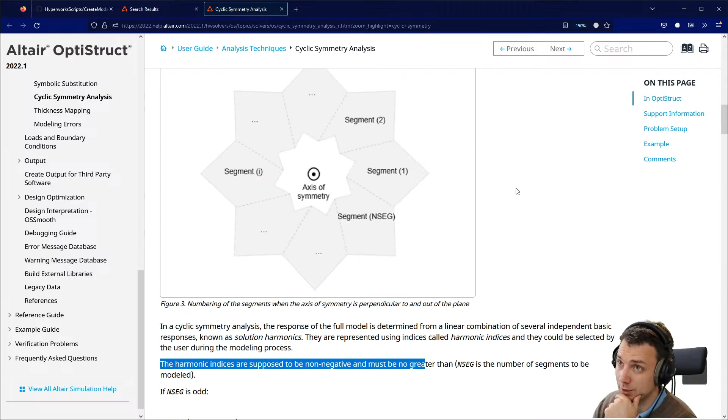And how this works, I was just reading about it, as I never dived that deep into this topic. It explains here a little bit about how the symmetry is achieved, and it uses harmonic indices, and you can also choose those. And I really don't know if I ever did that, and I'm not quite sure if I know exactly what is meant by that. But as far as I understand, you could have symmetry in multiple ways, right? So if you have the segments from 1 to n, let's say that one segment must be the same as another segment.

For example, let's just use here a cross, right? So segment 1 would not look like segment 2, because segment 2 would be empty, but segment 3 would be exactly like segment 1. And those are the harmonic indices, I think. So every second segment is the same for this cross, but you could also imagine that you have a star which has a line through each segment, and the harmonic indices would be, in this case, every segment. So every segment is the same. You see that you can have, how would you call that, sub-symmetries, right? So you have a pattern of repetition, and this pattern can be

almost basically arbitrary. And then it tells you that if you choose a lower number of those, I think it's segments, right? Lower harmonics lead to highest contribution, right? So if you have every segment, that would be a low number because it's 1, right? But on the other hand, I don't think I got that really. But you can see that, for example, if you just specify 5 repetitions, this would have an effect of having 5 sections which are more or less the same.

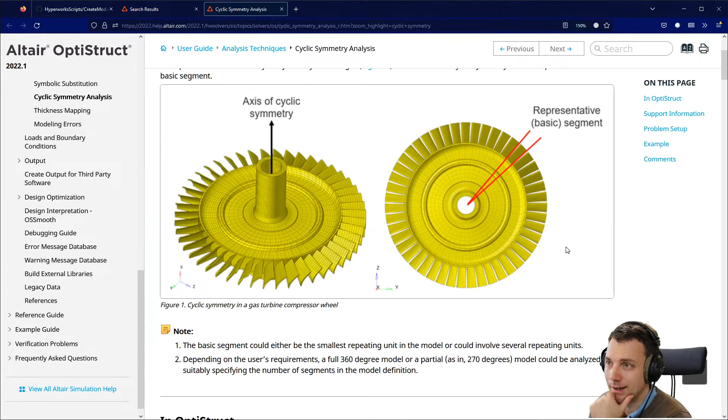Wait a second. If I think about it a little bit, it could be that it is not really talking about symmetry constraints, but those would work in the same way. Because to just analyze a structure, you could also pick a segment arbitrarily, and then just do a simulation based on this. So I'm not really sure what I'm looking at.

So with a linear static analysis with cyclic symmetry loading, you can do that. But here it says cyclic symmetric loading. It is recommended to use all the solution harmonics to obtain the same result as the full model. So it's talking about a reduced model. In this case, this is not really the symmetry constraint we are now facing with the optimization. It's kind of the same thing, but it's not really what we should be looking at. Let's go back and see.

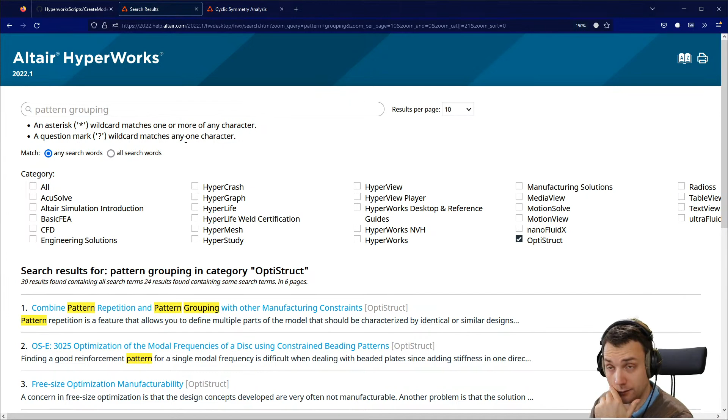It's all talking about cyclic symmetry analysis. Maybe I have to search for something different. I mean, it's definitely known under a different word named pattern grouping. But pattern grouping now would also have the plane symmetry in it. Yeah, and I think now I see that it's a little bit more tedious to find.

And that's maybe why I get these questions a little bit often about cyclic symmetry and how to apply it. And this is exactly also the reason why I would want to make this video. And yeah, this is more or less, okay.

Draw directions. And there should be the pattern grouping somewhere here. Extrusion constraint. Yeah, we have here pattern repetition. Plane symmetry, okay. Cyclic symmetry, I think this is more like it. All right, now cyclic symmetry can also be defined through the use of pattern grouping.

Like I said, you have a base node, a first node, or in this naming scheme, they call that anchor node, and this defines a plane where it is acting in the normal direction of the plane. So you have that, and now the number of repetitions is the second thing which you have to provide. And to add planar symmetry within each wedge, a second reference to grid needs to be done.

So you could also have a planar symmetry additionally to the cyclic symmetry. So this could be done as well. But for our case, this is not really a thing because we would not have a third dimension here, because in our model, you see, that's just shell. So planar symmetry would not change anything, really. Okay. So let's go back to the model.

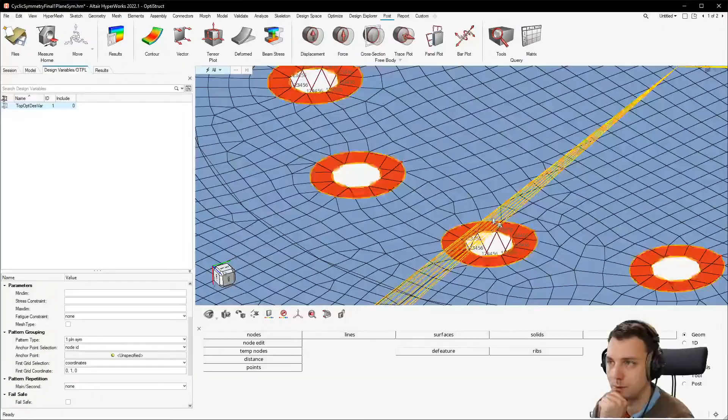First of all, we have a shell optimization now here, right? And the shell optimization consists of a design space and a non-design space. You have the red elements, which are non-design space. You have some boundary conditions, and you have the symmetry condition. So this is what we have done until now.

Now, I would want to do a little post-processing here and to just see different models, because what we have run here is some of the data. I think the only thing that was missing was the one with three symmetry.

Let me see. So just to show you here, this is the folder where I have stored the models, and you see from 1, 2, 3 is missing, 4, 5, 6, 7, 8, 9. So those are the optimization models I ran until now. And now I would want to run the third one as well to just be complete here.

So let's check back on our pattern grouping, should be here, right? So you have here pattern grouping. Design variables, then here in the topology design variable, and then in the property editor under pattern grouping. And you see here that's one plane symmetry, which is completely bonkers. But we will change that to be cyclic. Now here the number of the cyclic repetitions, in this case 3, because that's the one we are missing.

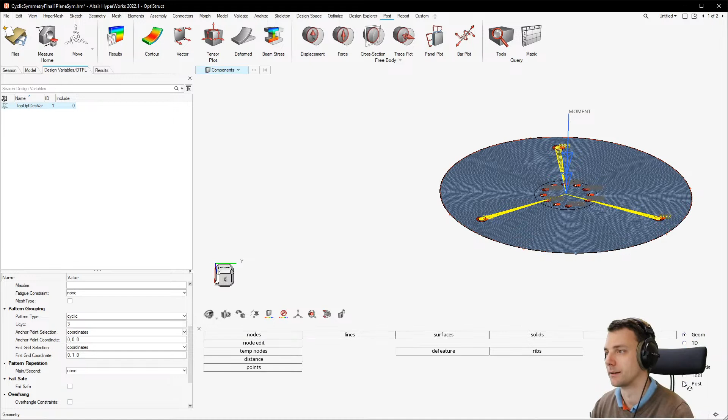And then anchor point selection. Let's choose to use coordinates because I think the center is exactly here. So I think that should be fine. Let's make sure to just create no panels for me. Oh, I'm sorry, no panels.

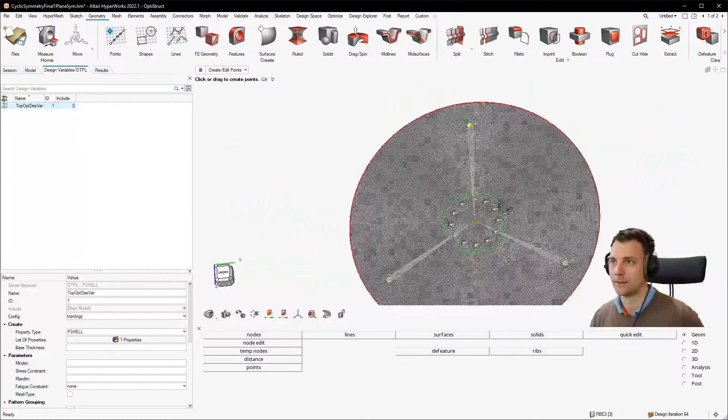Because the mesh is not regular. If the mesh would be regular and angular-wise you would have the same node pattern all around the circle, then you would expect to have the center point here to be exactly at the center, right? But in this case, you have it not, because I had used calculate the master node here, and so it was a little bit off. So we could fix that, I think.

So my quick fix would go to F11 and just do the replace point. Not sure how to do it with the panels, to be fair. If I just do something like replace, replace element. No, it's not really that. Let's see if I'm even right to do it like that.

So I would choose this point to replace. I cannot select it anyhow. Okay, forget about it. So you would want to update this element. All right, come on, let's do it. First of all, what I have here is not a node, it's a point.

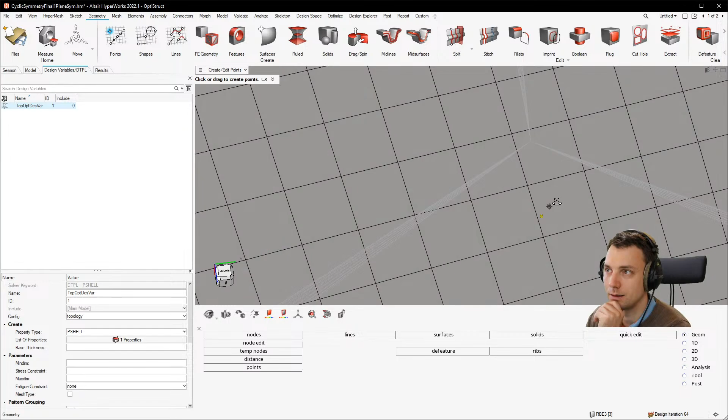So this is the first thing I think could go wrong. And the second thing is how to do it. Forget about the points here. You would want to go edit out and then choose the element selector by pressing the button E and then selecting the element. Then go to model and to RBE3, I think. This should be RBE3. And now you see you have already selected your independent nodes.

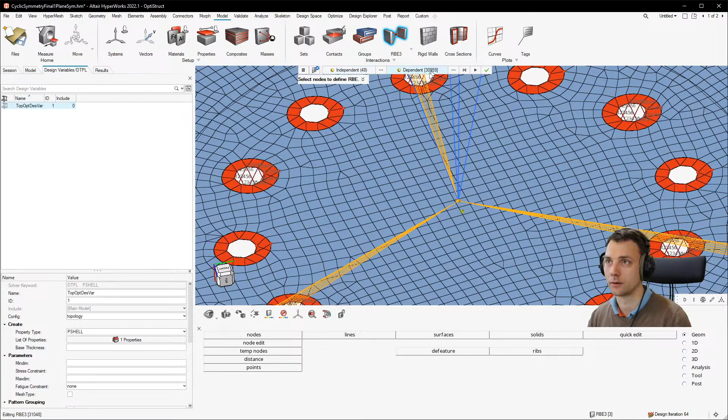Those are the other nodes, the slave nodes. And this is the dependent node. One is selected. Let's select this one. You see? It's not working. It's not working. And yeah, if I have now my forces gone, I will throw away the model and I'll just leave it be.

Yeah, I have lost a moment. This is something which happens if you choose to change the node: the forces which are defined at the node, they are gone. So don't do it. Okay, screw that. I will just throw this model away. Just load in the model with 1 times the rotation. So I will just use it here. And if that's not perfectly in the center, that's okay for me.

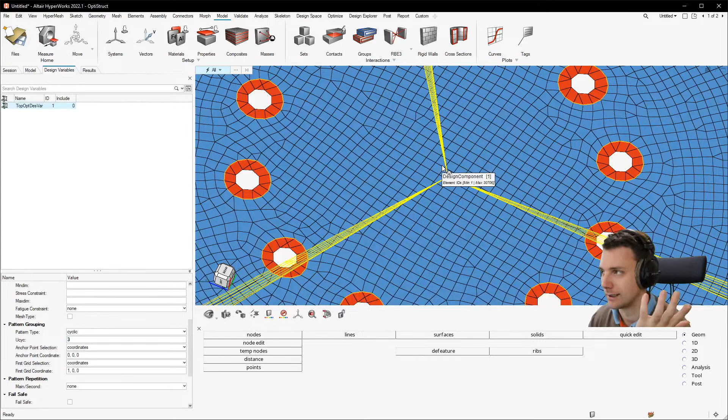Now, I want to change the design variable. So I go into the design variable browser, go back here, and then just use this one. Yeah. So as of here, this is perfectly fine anyway, because you would choose coordinates and not the node itself. So if you would have selected the node, it would be slightly off. But with the grid, it doesn't really matter, to be honest. So the thing is now selected here.

We have 3 times u_cyc, number of cyclic repetitions for cyclic symmetry. This field defines the number of radial wedges for cyclical symmetry. The angle of each wedge is computed as 360 degrees divided by the number of cycles. Default is blank and should be an integer above 0. Okay, that's done. Now let's just quickly run that.

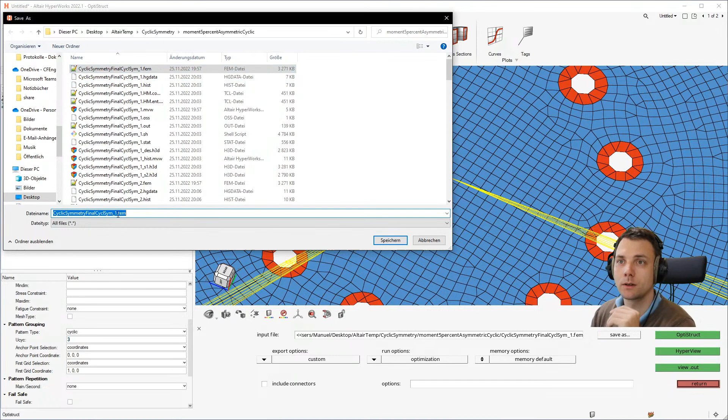Is that correct though? I will just simply make sure that it is. So I think the path should be the one. Yeah. And now we just want to change it to with a 3 at the end, so that we can track that. And this should give us no warning with renaming, but should just run it. Okay. Now this is done. The thing is now, what should we do next?

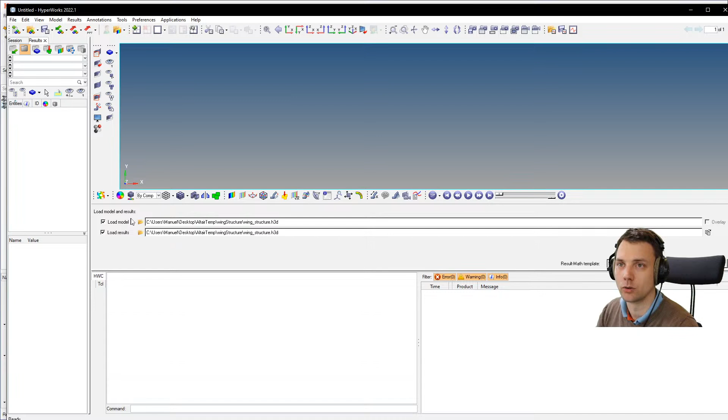Now comes the post-processing part. So let's assume we would want to post-process it. And just so you know how the old ways worked with HyperWorks. Or you could still do it like that, but I'm not sure how many versions you have left to get to the new layout. So you could launch HyperView. This is basically HyperView, and this is the old layout, so you would just load in a bunch of simulations. For example, we'll just go to the correct folder, and load in the design variables, right?

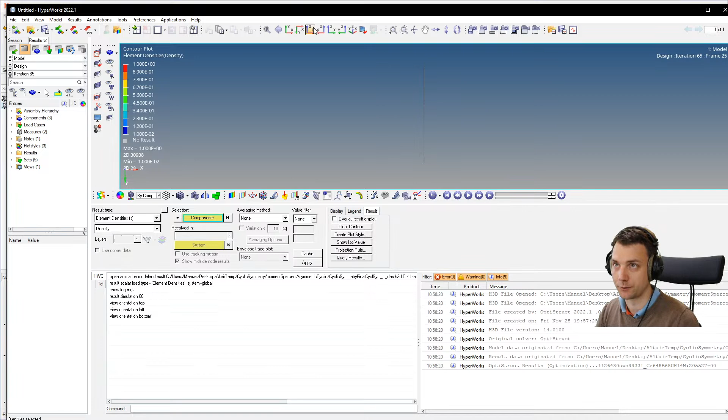So this will be the density plot. You can plot that, and it's with one cyclic symmetry. So this should be any structure really, because you have one symmetry per 360 degrees. So this is actually not much different from a non-cyclic symmetry. But let's see if we find any asymmetries here, because I think with the three symmetry we found some. First of all, let's ditch that away. Yeah, there are asymmetries here.

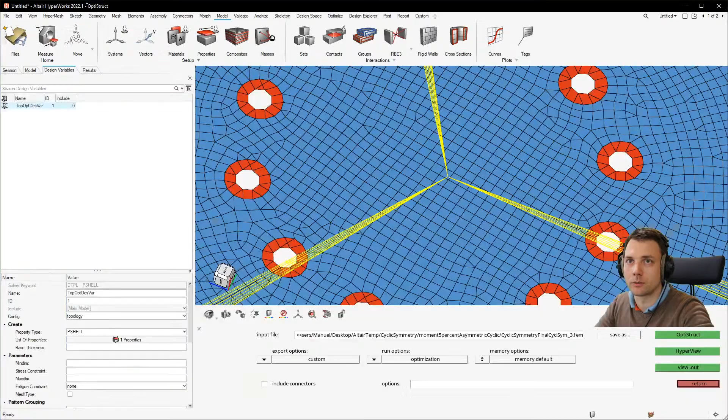So if we just go and rotate it like this, so that direction is here, and I think it was, no, I think the forces are not shown, right? Let's see. Yeah, okay. All right, it is this one. So top Y, top Z direction. That means it will be, in other words, top Y, top Z direction, this one.

Could we have spotted that? I think you can see that it has higher density elements here. So if you had to guess, I think you would come up with that too. Because here you have more compliance, so it will have more of a reason to put elements there to reduce it. And so this is what happens. That's exactly what happens.

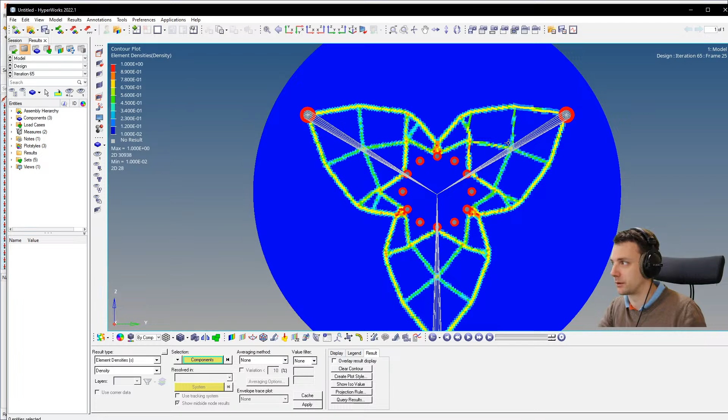Now, we want to combine or to look at different simulations. And the way to do this here is to choose a layout. And the layout is chosen here. It's a little bit different. Now, if you want to have 9 separate windows, right? So we could work like this.

So it could work like this, and now just choose to change the result, because that goes a little bit quicker. The model is the same anyway. So this would be the second one, this would be the third one. It will be a little bit boring to watch me do this, but it will load the results in every window, and then we can compare. And we have to reload the third one because the optimization is still ongoing, so it's not really finished. So 1, 2, 3, 4, 5.

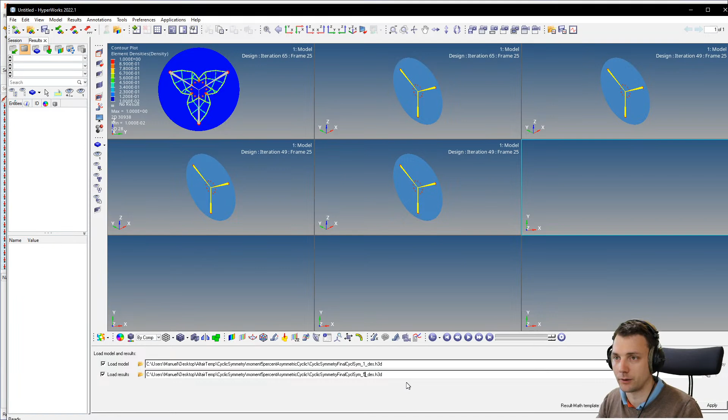I think for that, it's better to get myself a little bit down here. So 6 would be here. And you also see this light blue line here. This indicates which of the windows is active for opening it, so that you're not confused what is in which window. This will load in the results once you click apply. And don't worry if you just apply it, it will ask you, do you really want to? Yeah, I want to have it here. So this is how to do it.

Now here comes a trick. That's pretty cool and amazing. And by the way, the optimization for the third one has finished. So I will just reload this one and see, it also remembers. So you can just say apply once more, and you have the model. So now comes the trick. First of all, you can maximize and minimize a window like that, and you can just choose to change something.

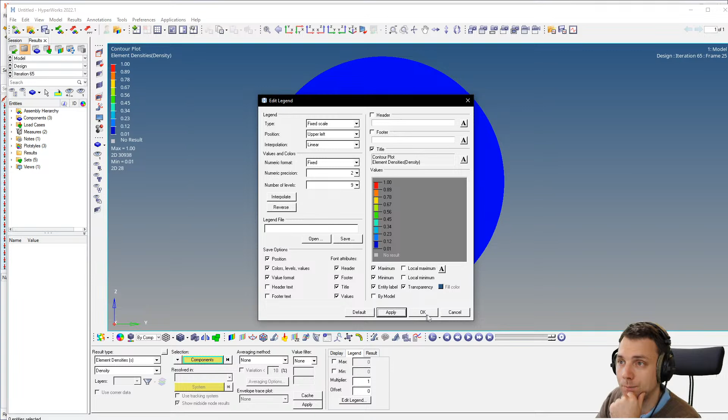For example, what I always try to do is with the legend, I really don't see any point of having a legend in a scientific format. So we go to have a fixed one, and the numeric precision is 2. That is pretty much enough, and you don't have too much clutter. Then you would have a note, because in your reporting you would want to know in the screenshot which one is which, unless you want to edit that in some sort of vector graphic program like Inkscape. And then you can do your notes there.

But if you wanted to have it here, you can. You go into the notes menu, which is here, and add a new note and just say this is model with usym: 1. So you could just add this, and sorry, that was too much. Okay. Again, model with usym: 1. Now apply, and now you have it here, and you could just place it here, and you could change the color and the font and whatever. Maybe we will want to make it a little bit bigger.

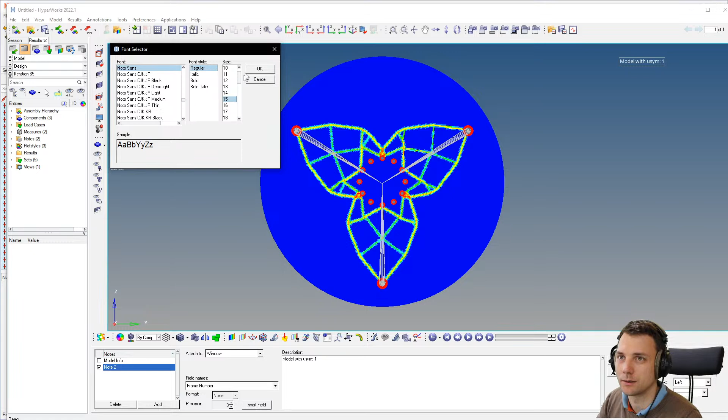And there's a reason why I'm doing that now compared to later. You will see in a minute. So you see, I think this is readable, and you can also see the shape. So this should be all right, I think. Then we could go a little bit further. Should we really have just a contour plot, or should we have also the isoplot? Isoplot means that you would have just a structure. That makes sense to me, especially to have it in the background, because the background will be white. So you would have a cleaner picture.

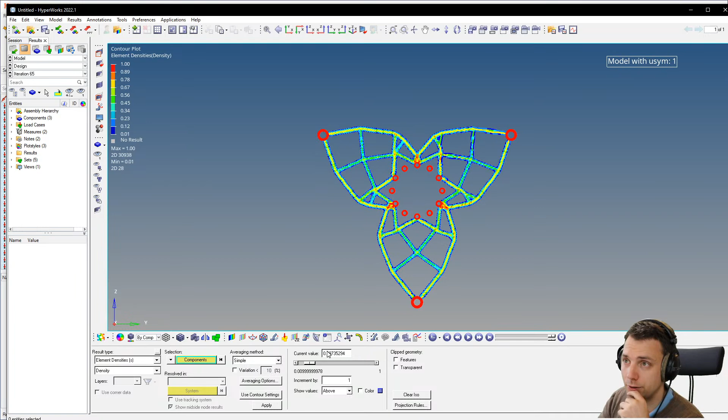On the other side, there's a point to be made about the design space as well. I will leave it like that for the moment. And then also for the contour plot, you would have to choose an averaging method. Just look at the difference. This is unaveraged. You see that every element has its own color. And you could also shade the corners between to see the elements even a little bit more. But if you want to print it at a smaller scale, that would not look so nice. So go with the shaded elements better.

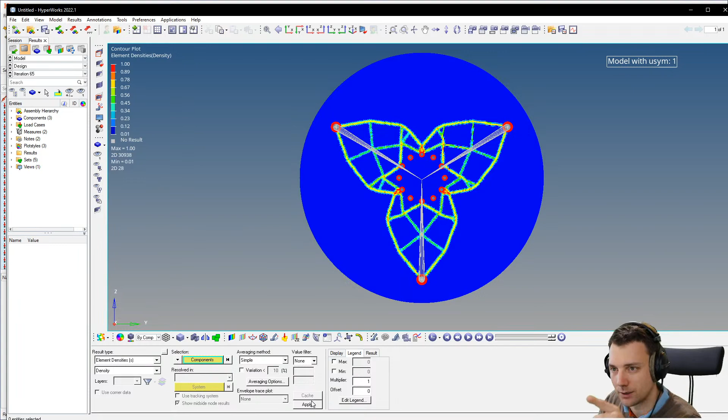And now watch that change to simple. Simple averaging means you have finer contours, but also nonsense like the snake line and stuff like that. There's points for each. I will go with the simple here just because it looks a little bit nicer to my eyes. And now I have done all this, and I don't want to do this all again for all the different windows here, right? So now bear with me. This is really a cool trick.

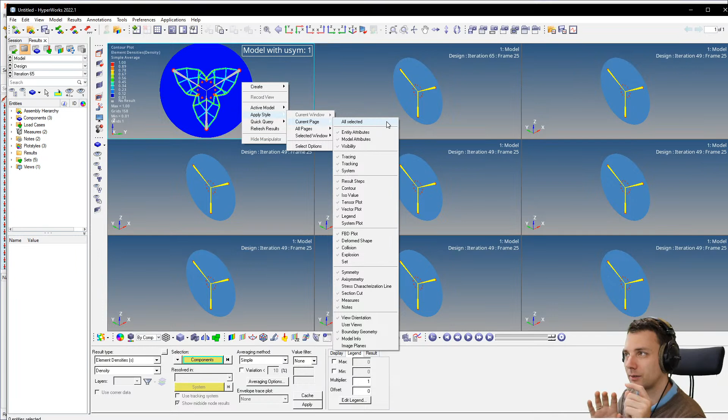Right click here. Then you go to apply style, current page, all selected. This command does the following. It changes all of the other windows. Or is it pages? I'm not sure. I think it's windows. All the other windows to exactly the same formatting style as the ones you have selected. So, boom, that's it, right?

And now let's look at those beauties, right? For sure, what you would have to do is to change every note here because it cannot increment. So you would want to change that to 2, that to 3, and stuff like that. So we'll do that quickly.

And maybe we will also write the compliance it achieved, because that's more or less the score, right? So the score you get for your optimization job, or this was the goal, to be more precise, the objective. The optimizer had the task of minimizing the compliance, and that's exactly the measuring criterion you should look at in terms of comparing different solutions.

So this is it. Well, let's be a little bit more clear about that, because there's a little bit of confusion going around this topic. So you have a minimization of compliance as a solver task, right? So this is your task. The one thing to look at is how good the solver did its job, right? Did it achieve a very low compliance or did it not? And you can compare that because you have the same boundary conditions and the same design volume at the beginning.

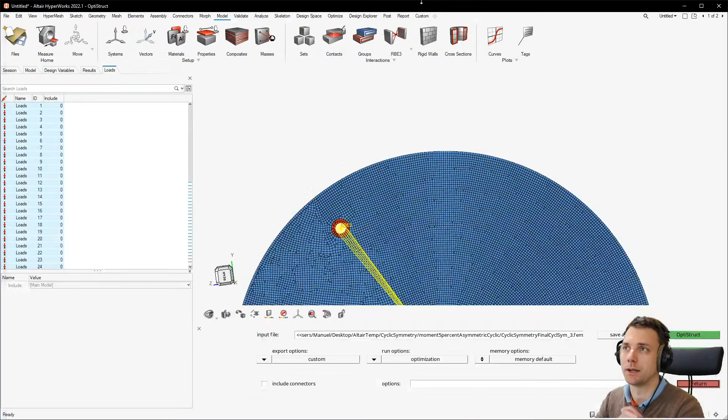And then the other side of things is that you look at the design constraint, right? So right now we would have a given fixed volume constraint. What I mean by that is when you look back at the optimization, this optimization was set up so that you had an optimization constraint of volume fraction, and that should be upper bound 0.05. If we change that to be, I don't know, 10% or so, the structures will look different. And in fact, I think that's quite a good thing to just see. Maybe we will run that.

Yeah. I think I will do that in a second, and then the other thing we want to do is extract all the compliance values, because if we want to pick a top winner, we want to see how much of a difference the different symmetry constraints made, right? And also the question of which number of symmetry we should take.

So you could look here, and I think the guys from the manufacturing team will go nuts on those kinds of structures. I mean, you still need a little bit of human intelligence to see and interpret the structures. But we didn't do a routine which always finds the best solution. It was not the task to do that, but just look at structures like this one.

Yeah, so going back, if you wanted to do a little bit better job of looking at the output files, just because you're interested, you would open the notepad and see. Let me quickly close the other files. Now you would go into the out file, scroll down and see what was the end message. Optimization has converged, feasible design, all constraints satisfied. That is the first good thing.

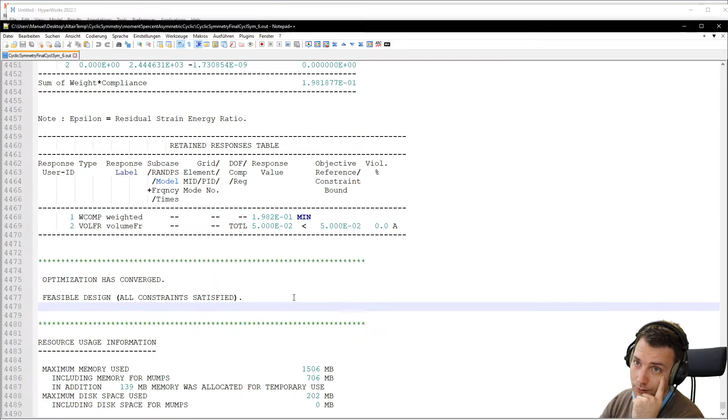You would want to see something like this, because that tells you that it did not run into a limit of too many iterations or stuff like that, which is arbitrary, but still. It also did not fail to converge the optimization, which is also a good thing. The second thing you would want to check is the density. What strikes me here a little bit is that you don't have very high density elements.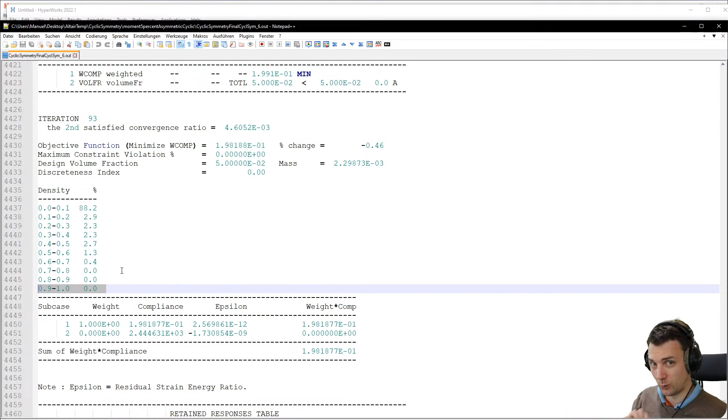But you as an optimization guy, you would want to have a 1 and 0 design. So you penalize the medium density elements. And so that is not really helping. So in this case, my first observation here would be that probably the constraint for the volume fraction is too low. In that case, we will just increase that.

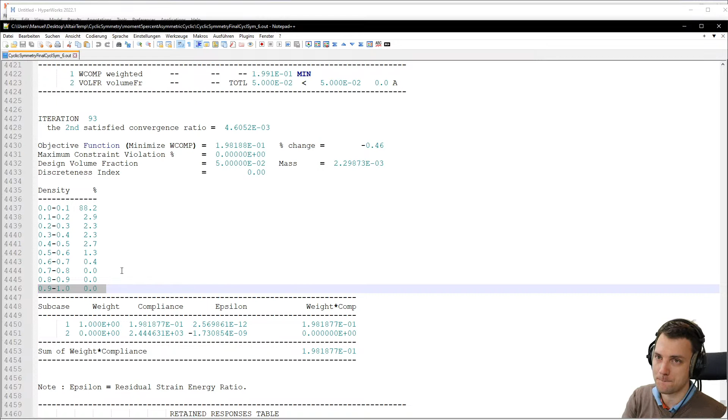Now, how to do this? I will just choose to use a little bit of different tools. There's multiple ways of doing it. The first and easiest way is to just go back to our optimization model, change the volume frac here to 0.1, the upper bound, and then run it again. And always changing the symmetry and running all again. So this could be a thing.

But I don't know, really. There should be a better solution. And this is always a thing which I would recommend to you. Always search for a better solution than doing it the first way which comes to your mind. Because then, I don't know how to describe that, but you will not evolve. So the second thought which came to my mind was to use HyperStudy.

You could use HyperStudy and read in the text files and then just set up the simulation, and the simulation would just change the numbers in the text files and then run the simulations all by itself. That could be another thing, but I think for this easy task, it's too much of a hassle to set it up. Third thing which comes to my mind is to just copy every .fem file into another folder and change it by using a text editor. And I think this is exactly what I will be doing.

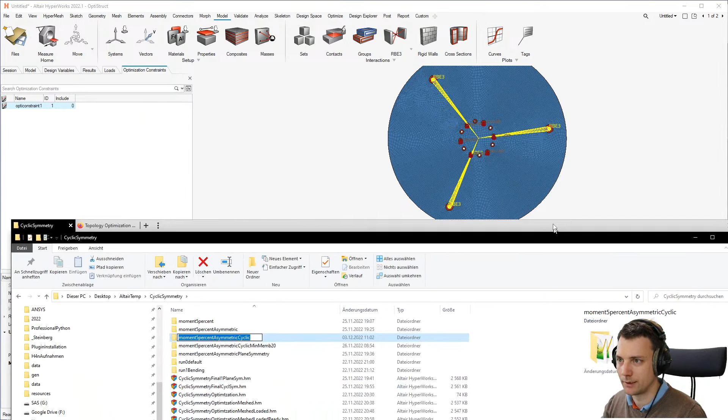Now I just want to walk you through that. I will just create now a second folder. And this folder, I will call it just the same as what we have used until now, and I will just call that with, let's say 10%. Now, I will go here and just search for .fem files. All right, I misspelled it here, but it's okay. So I had from 1 to 9 every .fem file, and I will copy that now into the 10% folder.

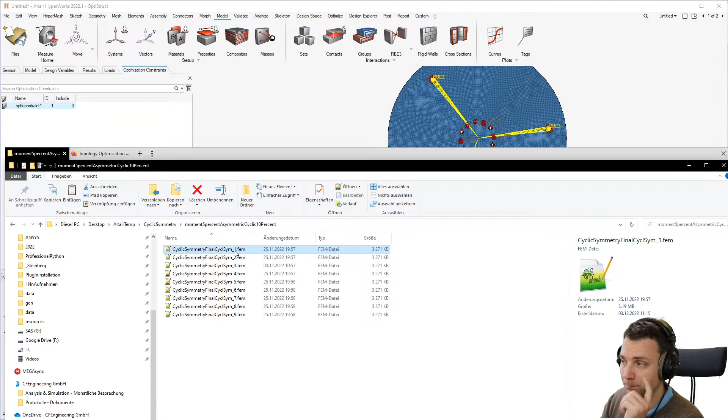Now, if you don't have Notepad++ installed on your system, shame on you. It is by far a better text editor than the typical Notepad. Though Notepad has some cool features too. I think I even saw an automatic logger you can enable with the standard Windows Notepad. That was pretty fun. But no, Notepad++, seriously, it's a good thing.

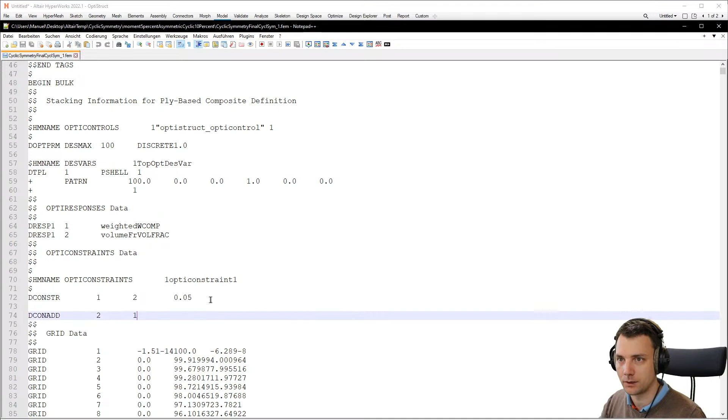Now, we are here in this file, and what we want to change is the constraint here. So this line we would want to change. So I copy that line. And now I just search in files. That's under edit, search in files, Control-Shift-F. And this will let you search and replace in files. So I will just paste that in here, paste it again for the second time.

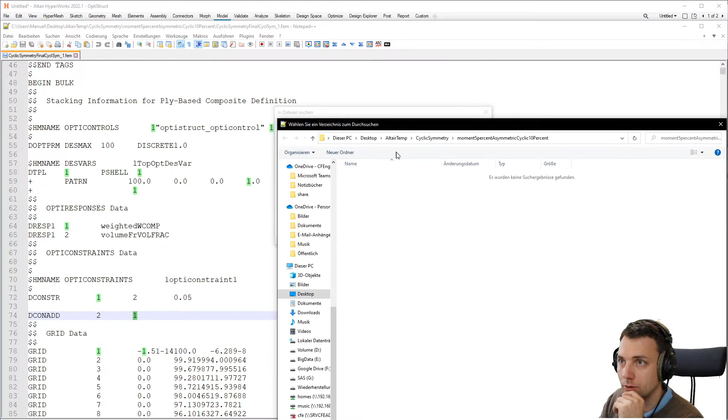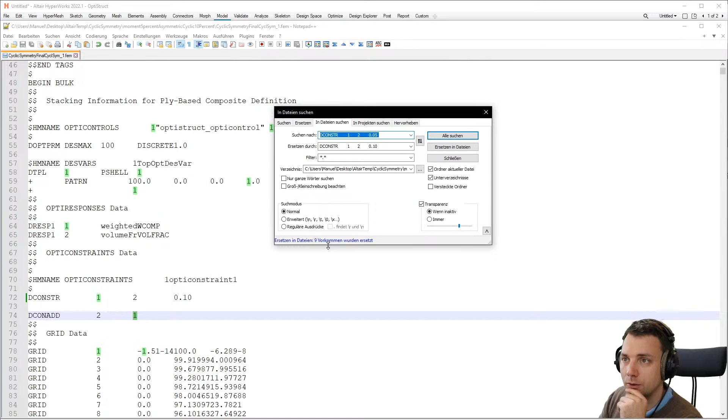So I have just replaced 0.05 with 0.10. Now, in which folder? This is exactly the folder I'm currently in, so perfect. Now I will just go replace in files. I could also choose a filter if I wanted it to just have an effect on .fem files, but in this case I just have .fem files, so there's not really a point. So I replace it in all files, and it does not do it. What? Okay, let's go with normal. All right, replace in files, 9 times it replaced it. So that's okay. I close that file.

Maybe we want to do that once again for 15%. So we could just copy that another time and call it 15%. Oops. Same thing. I go in here, search, replace in files. Now I would want to look for the 10, and I would want to replace it with 15. And let's check the folder, if that's still the correct folder. 15%, that's correct. I'm in normal mode. I will replace all, 9 times. All right, it has done that.

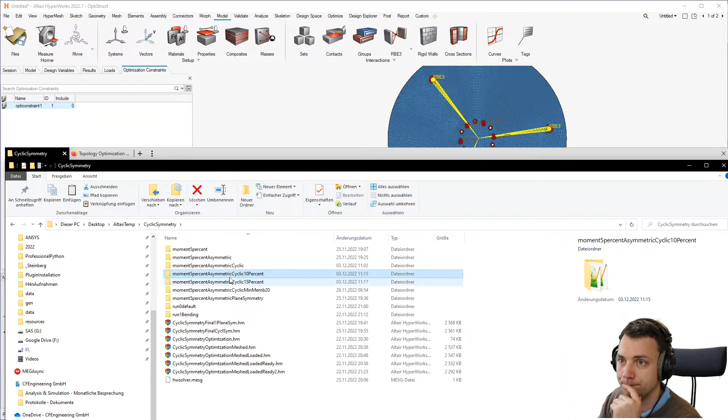Now I can run the simulations, and how to do this with a batch. You could simply go in the folder, copy the path to the folder, and then launch the OptiStruct launcher. I think this is called different now. I have to tell myself that every time. It's called Compute Console, not OptiStruct anymore. Yeah, Compute Console. And now you could go to the folder.

You can post links in here. You just select all of the files and press open. You could now have run options, for example, the number of cores and stuff like that. Let's see, the number of threads.

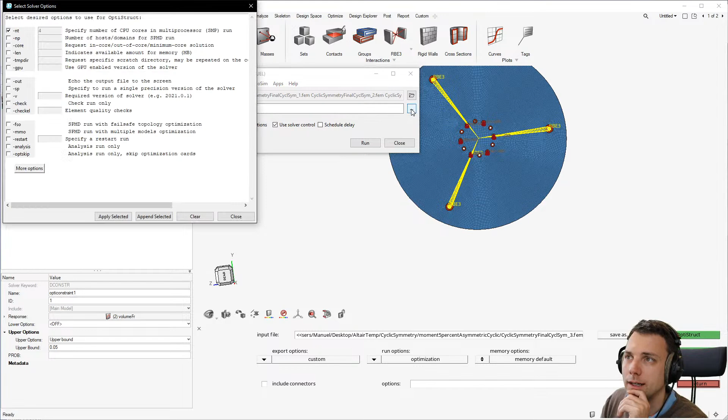What is this machine again? Getting confused about it. It's a 24 core, 12 cores, but 24 processors. Yeah, let's go with 12. Oh no. Let's go with 4. And that's because I want to have it run multiple times. Is that even a thing here? No, that's not. Okay, forget about it. No options. Just run it.

And now it will run all the simulations in sequence, right? Or not, no, I can do it in parallel because why not? Sorry. Compute console. Because I could run 2 simulations at the same time. I think the memory requirement on this is not really that big. 800 megabytes, yeah, that's not really much of a deal. So I can run a second one.

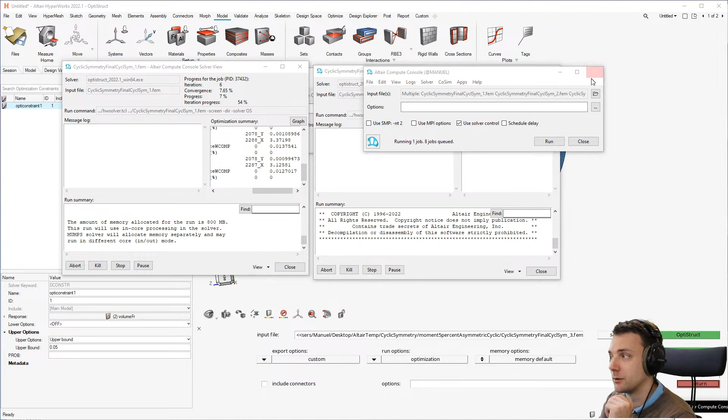Even faster would be to just run everything in parallel. But I would have to set that up. In the meantime, what we can do now is check on, sorry, lost for words, the compliance values, right? Because we had all this, but we have no idea about the compliance values. And now you could go in every text file and extract the value of the last iteration, or you use a tool for that.

And I have done a little script, like this one. I showed that in the last live stream or so, but I will show it a little bit again, so how to use it at least. So there is this task CLI, and then you have an objectives command. But with task, you would need double dashes, and then you can give in the arguments. That's a task thing.

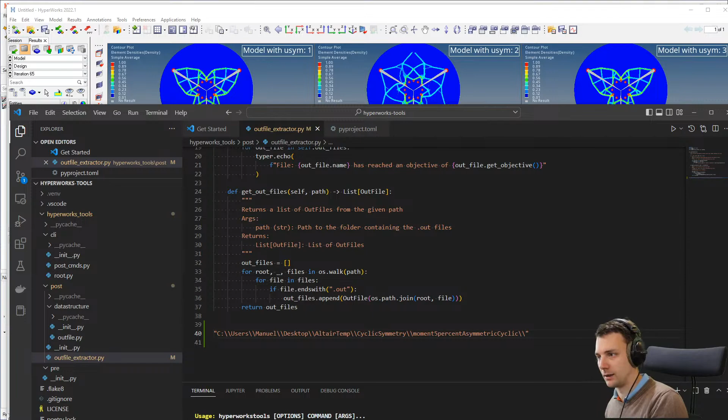So it's not really programmed that way, but you could give arguments for task, and you can also pipe command line interface arguments into the subcommand in task. So it's a little bit complicated, but just use dash dash and then a space, and then you can choose to use the commands here. Objectives. And now we would need a path. And I have just copied that path here because I don't really know if you would want to have dashes. I'm not sure. We will see about that.

But the thing is, you would want double backslashes and no single backslashes, because it will not work, because task has a problem with that. Yeah, it's a little bit annoying. Okay, see? This is so beautiful. Sorry, I really like that. So you see, I just pasted in the folder, and it went through every out file and chose to output the compliance value of the last iteration.

And now let's look at it for a little bit. The first one won by a lot. Then the third one is also pretty good. So the first and the third, those two have won in terms of minimizing the compliance. And because the design space is the same for everything, and optimization constraints are the same, you can directly compare those values, right? That means, looking back at it, choosing no symmetry at all, that means 1, is the way to win. Or using 3.

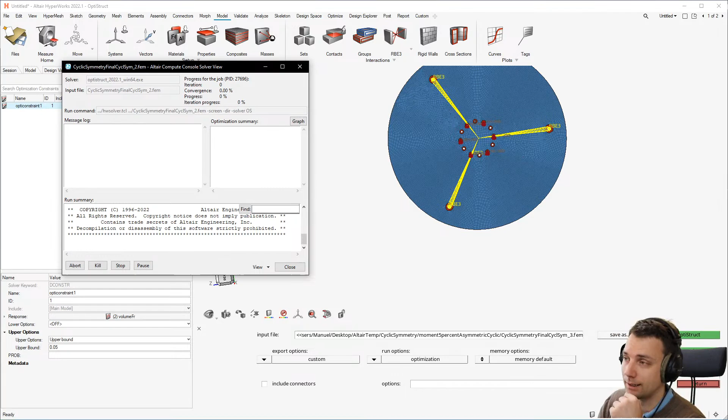That sounds wrong, right? So compliance here is not something to do with your work philosophy or your work environment, but rather how much the structure will yield under stress. It's not really that either. No, it's how much it will deform under load. That's more appropriate. So having a low compliance is a good thing, because that's what we were aiming for. And having a low compliance is the same thing as having a high stiffness. So if the model is very stiff, it has a low compliance, because those are inversely proportional. Or they're related, to be honest.

They're related. Okay, now we can just copy those values and put them into the notes to have a more complete post-processing picture. And then I want to try and see how to save the session file here and open that in a new version and see how it turns out. Because that's a new thing. You can use post-processing in HyperWorks too, right? So the new layout. And that's basically more or less it, because that's what I'm aiming for.

Now, so much to do. All right, in the meantime, the simulations are running. The first one is already completed, but it will take some time. Okay, now I will just go with that and change the note. And let's see, I have a second line with compliance.

0.05. Let's see how this turns out. Yeah, I don't like it very much, but I don't want to change it either. So yeah, I will just leave it like that. I will go with 2 decimal places of precision. So second one.

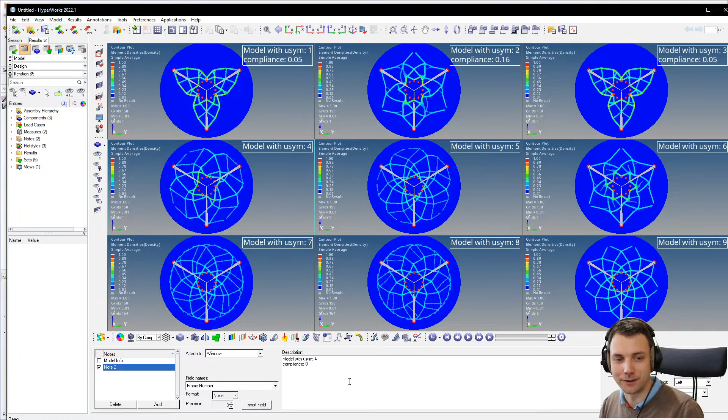Just thinking about the unit of compliance. I've completely forgotten about it. But I know it was something like the inverse of the stiffness. And stiffness is force by millimeter, right? So it would be millimeter by force. But on the other hand, I remember that you calculate it by multiplying force times displacement, so it should be Newton millimeters. Yeah, I think it's Newton millimeters, but we can look that up in a minute.

So the third one, no, the fourth one was 0.34. I mean, look at that, right? You have, I don't know, 6 times the compliance.

16 times the detail. No, that was a bad joke about a video game. Okay.

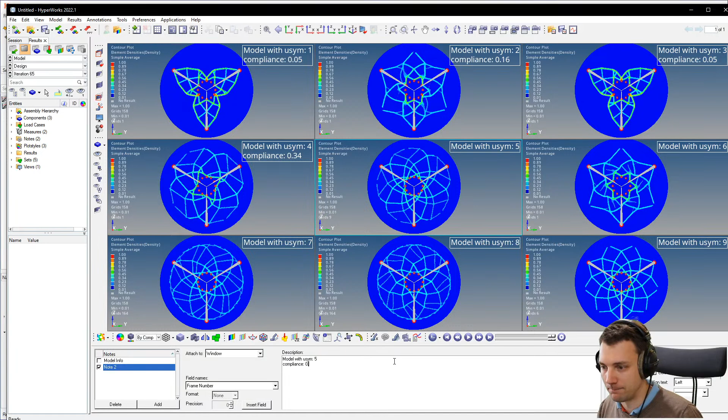0.54. Oh, let's see. Maybe we get to the 16 times. So the 6th one has 0.2. Oh, fuck. 0.77. And finally 0.28.

So, what do you think? 0.77. It's not quite 16 times. Well, it is. No, it's not. I cannot calculate very well in my head right now, to be honest. But 5 times what equals 77? 15, 16. Yeah, could be 16, man. 15 times 5 is 75. Yeah, it's not quite 16 times the detail. Yeah, the jokes are getting worse.

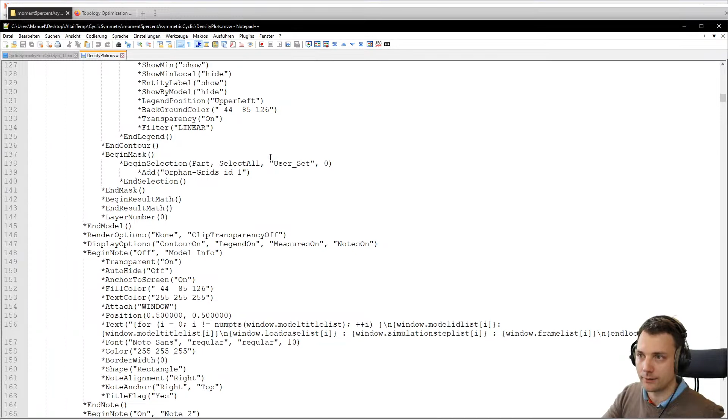Yeah, there's so much confusion about the session files. Sometimes I get mails with questions, and all they send me to look at is those session files, right? So this MVW file. This is session files. And if you just open that with a notepad, this contains in clear text only links and how to arrange it and what colors to plot and stuff like that. So it's just having basic preferences and your paths.

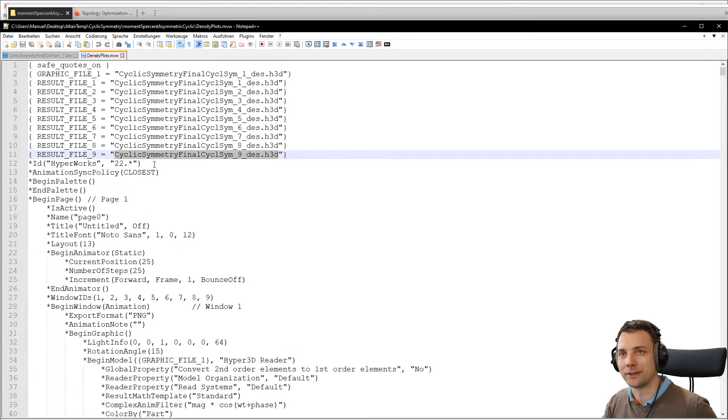You see, cyclic symmetry 9. So this is a relative path in the folder which the session file is in. So actually that should work in the other directories as well. Let's see if that does, but I think so. And you have just settings and how your contour plot is done and the transparency is set to off and whatever. You see, this is not the actual result data. The actual result data is saved in binary form in the H3D files. So if you open that with a text editor, good luck. You can forget about that.

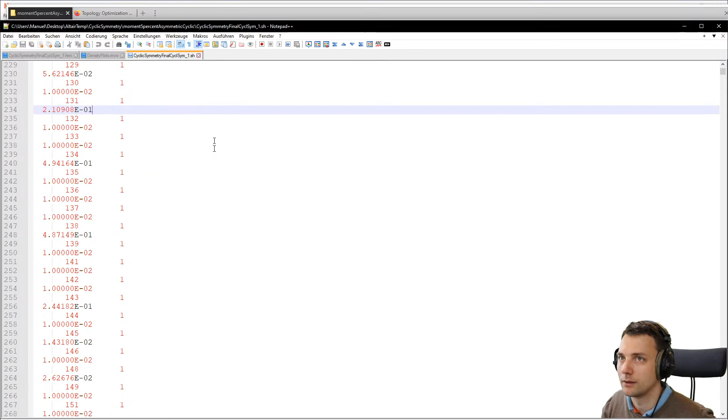And I think in the res files as well, if there are any. Is it no? I'm mixing now different solvers. You have des files, sh files. In the sh files, there should be results as well. Yeah, you can see, for example, here. I think those are density values. I'm not sure about it, but you have results in multiple files, but not in MVW files. The MVW files don't show you any results. So if you have a question or want to ask something, don't send just a session file.

But the good thing about the session file is we don't need a model here, so we can just go to new. We can open that now in the new HyperWorks. Let's see. I'm very much looking forward to see what this gets us. Huh? There's no HyperView session file. HyperMesh, HyperWorks session file, I don't know. I should be able to open that. Open. Is there session? No, there's not.

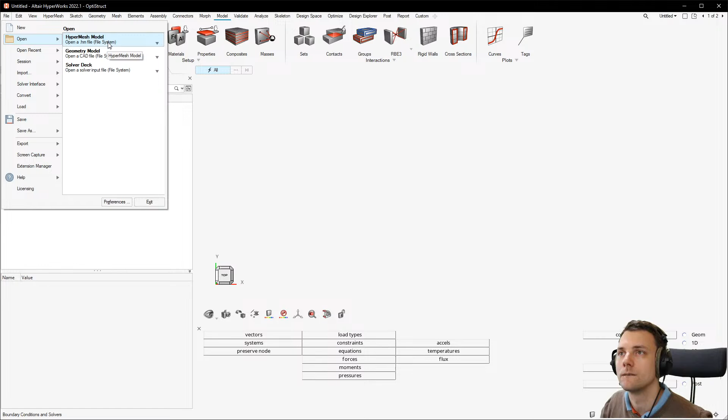Okay. But I can also just save it as a model. I'm getting a little bit confused. Let's see if the drag and drop works, because if not, I would have to change this all to the new layout as well. Because I know it's possible. I know it's possible, because you have a window layout here as well. So you can choose to have something like this and then load in different kinds of things. Let's see. What can go wrong?

Boom, works. Man, it's not that pretty because the thing is, I think with the sidebar, yeah, but you can get to the results pretty fast. But how did we do that? Actually, now I'm a little bit confused. So I'm now in Hyperview. It changed it to Hyperview. But because I was having the problem of not being able to go back to Hyperworks, it changed it somehow to Hyperview. But I missed the button where to do that manually.

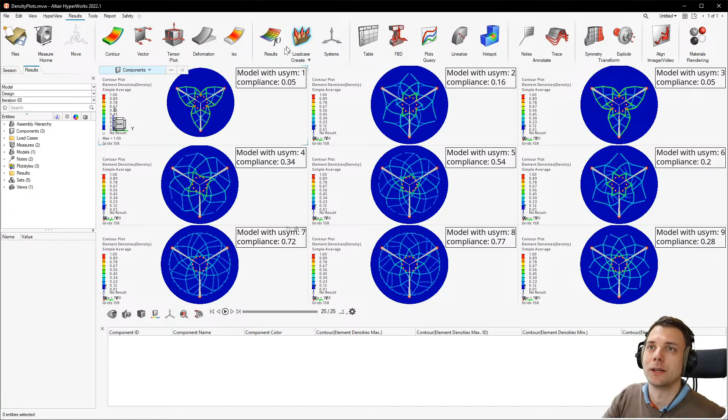So definitely we're on the results. Sorry about the optimizations being started in the background. And we now have all different plots, like contour plot, and you see that's all the Hyperview layout and stuff. But how was it changed? This is the synchronize button, also very important. Now let's see. Can I save it now as a session? Save as session. Yeah, this changed. So as I was just importing the MVW file, it changed. But on the other hand, you see there is still something different about the window.

So the first one here has this cube. So I think this is the main instance, right? Or is it? No, it's not the main instance. It's just the active window. But let's say you want to have one of those windows maximized. Is there a way? So you can go to this, but which one is it now? Let's say I want to work on something here. Can I now change to one window and have that structure? No. Okay. Ah, this is where it changed the type to Hypermesh Hyperview. Yeah, okay.

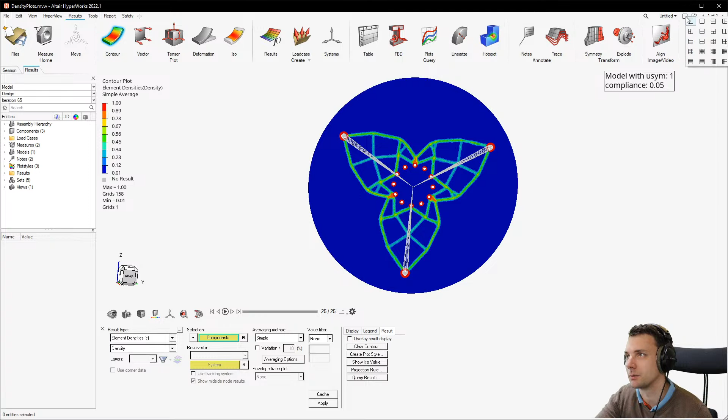Now, what about, what is this? Not getting that, to be honest. Let's go back to the 9 times view. Yeah, I think we can drag that, change type, and enlarge it. Maximize. Yeah, okay. So I see it now. You see the 3 buttons, which are kind of transparent, at each of those windows here. You can maximize this one, work here, and go back with minimize. Yeah, that's cool. And right now, there's no synchronization between the windows, but you could enable them to be synchronized. And so this enables you to quickly look at the model and just arrange it a little bit here. Yeah.

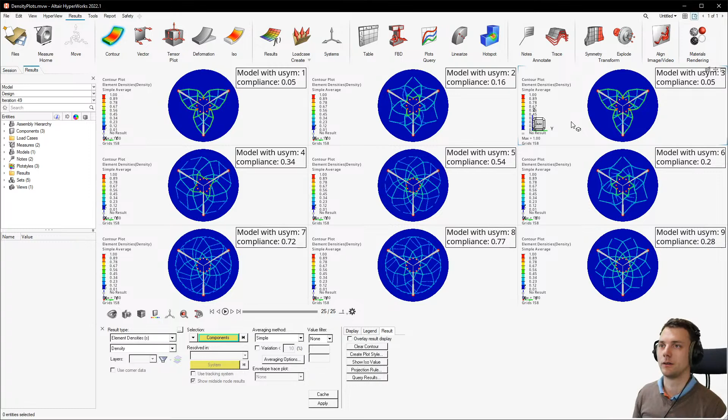Yeah, all right, that works. Oh, okay. Always learning, always learning. So we got to see how this works and how to change the different applications. So this is done at the top right. Okay. And if you change it to Hyperview, for sure you will have to load in different session files. Okay, that's good, thanks. You have notes here, you have Trace, all the different...

That's the thing with learning, right? So you're comfortable with what you have learned and what you can apply. Now a new thing comes along. As always. And the first thing you will feel is frustration, because there's this way you know how to do things, and there's some sort of calmness to it because you can relate. You can just see that and think to yourself, all right, I know what to click to get my desired result. Whenever there's something new, first thing is a little bit of frustration because you don't know what to do. And then you have to just pierce through this frustration and learn a new way, and then it's all calm again.

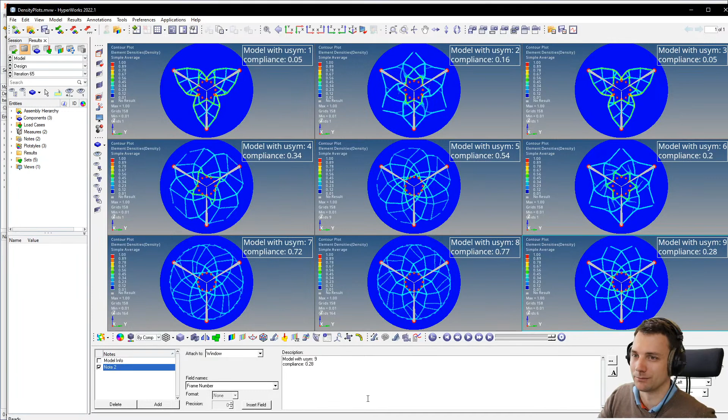But the other possibility is to just quit it. You get frustrated and say, all right, I'm never ever opening Hyperworks again. Where's my old layout? And stuff like that. And it's obvious that I try to just go through that phase of frustration and learn how to do it differently. So this moment right here. I clicked on the notes, and what I was expecting is to have the familiar notes panel here. And instead, I get this mini tool up here, which is kind of hard. So I would now want to select a node or a component or an element or nodes.

So they combined multiple of the functionalities in one tool, I think. And now I can create a note, hopefully. No, I could select a node. Okay, that's not really good. Okay, nodes. Can I click here? Yeah, so I've created a note here. I can drag it around. Can I size it? No. But this was not possible in the old one.

So I have a label for the note. I have a text for the note. For the text, there comes a different pop-up menu where I can just type in stuff. This is some text. All right, and there's now a placeholder for different variables. Or let's say I want to have the model title here. Can I just drag that, double click? Insert field. Okay.

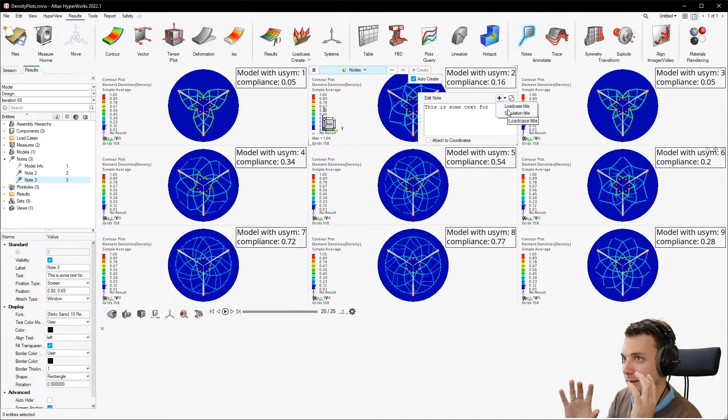But you see, you have now two different kinds of ways of seeing it, because there's now a frustration cycle inside the frustration cycle. You have a new layout and you said, all right, I'm gonna learn the new layout. So you learned the new layout and thought, oh, cool, you have some fields I can put in, but double click is not working. Okay, you have to press the button insert field. All right, good. There's a note here and it has missing text. You want to open it again. And now you're getting again another layout to just do the same thing. So this is kind of the frustration into the frustration.

But once, all right, how does this work? Okay, I have a plus here, and then you can do a load case title. So this gives you the fields, but now shrunken down to just that set which actually has values, maybe. Then this would be another good thing. Let's see. We go for load case title. And then, what can I do here? Entity editor. Oh my god, no. Go back. How can I make that back? Okay.

Again. I'm deleting that. I will input the load case title, and now I want to have that gone. What do I do? This one is clearly not it. So just pressing escape, maybe? No, that did not change it. Okay, another way I know how to do it is just go here and then just use it like this, right? So that should be a load case title. So insert field, okay. Yeah, this works. But I'm still not quite sure.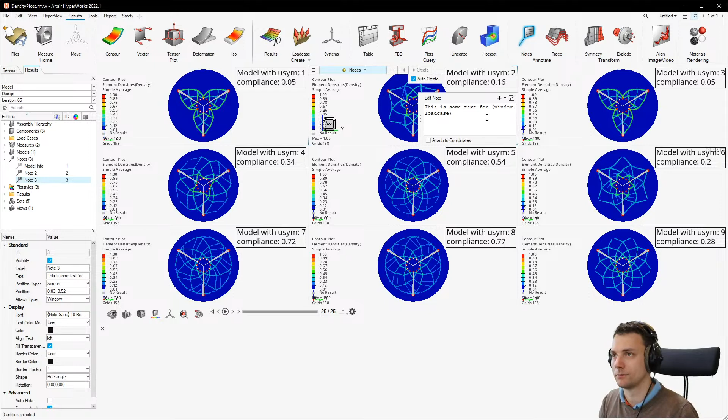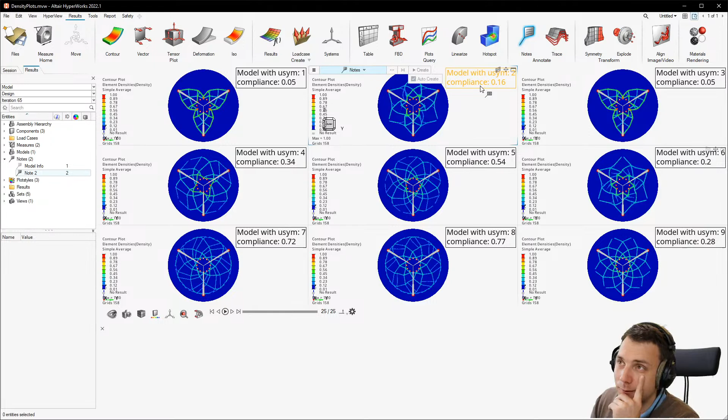Enter, it's not it. Pressing another. Ah, you have to just press something out of the note. Okay. And can I delete it with just hitting the delete key? No. But maybe if I just go to notes, select that, and now delete it. Yeah, that works. So you see, it's not that bad, to be honest. So this second edit function, that's kind of strange. But on the other hand, this is a little bit smaller and could be handy if you want to have a note edit, it will not open the whole menu all again. Could be a good thing. Yeah, so just like that, we learned a new way.

Ah, still we have our selector. Man, the selector is powerful. To be honest, the selector is pretty powerful. Can delete almost anything with that, and it is context sensitive. I like that about it, because if you have not any notes in a model, it will not show you that. So I have measures here. Not sure if I did any, but okay. Yeah, so I like that.

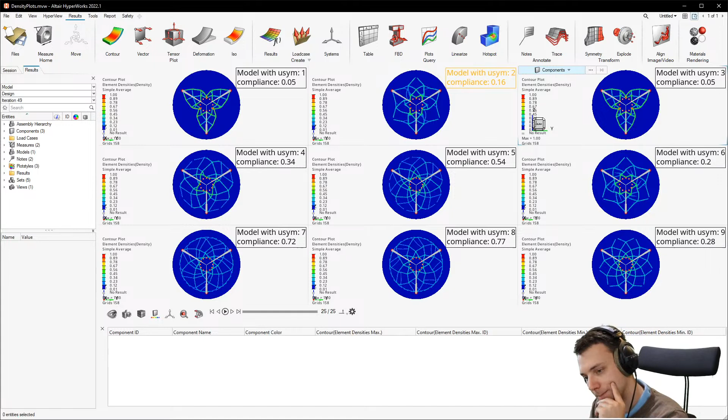Now, how to save that as a screenshot? So it used to be just a click on a button here. And what I really liked also was this functionality that you could choose to either save that in a file or save it to clipboard immediately. And if you just press this button, it copied that to your clipboard. And don't mind the optimization thing going on here, but if I just have now PowerPoint and just copy paste here, yeah, you have it as easy. So this was pretty neat.

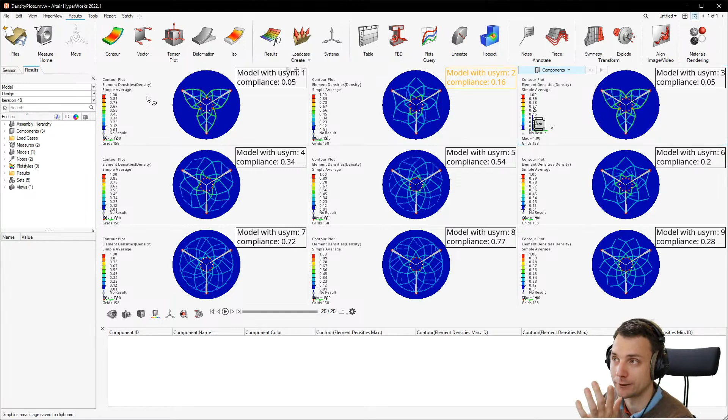Let's see how this goes in the new design. This would be file and then screen capture, image to clipboard. So you would have to make two clicks, and it takes you a little bit longer. I don't really like it, to be honest. If there's a shortcut, that would be even better. But yeah, I don't see that there is any until this point. Now let's see what we're getting. We just hit a new thing here. Yeah, it looks kind of different. The lighting is different.

And the aspect ratio is different, but that could also be because of the sidebar. Yeah, but you can work with both, to be honest. It's not that much of a hurdle. So you could just go with that. We have it synchronized, right? Let's choose to just slightly offset it here. And just once more going for screen capture. Screen capture, image to clipboard. All right, and let's paste it in here.

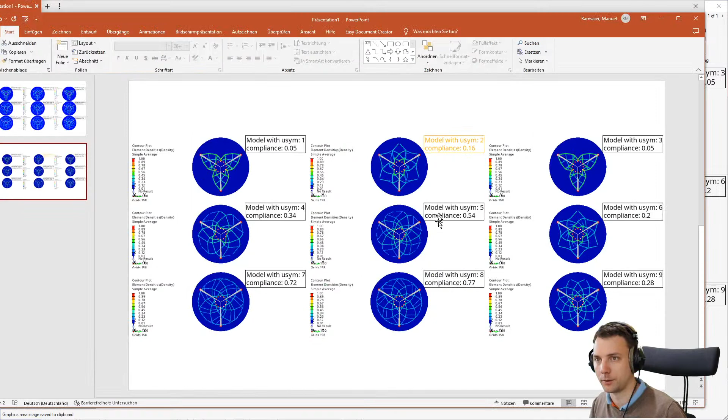Yeah, why is this yellow? Oh my god. We have to change that. Okay, this is yellow because it's selected. But okay. Quick, don't move. All right, file, save, or screen capture. Image to clipboard. Come on, there must be a shortcut for it.

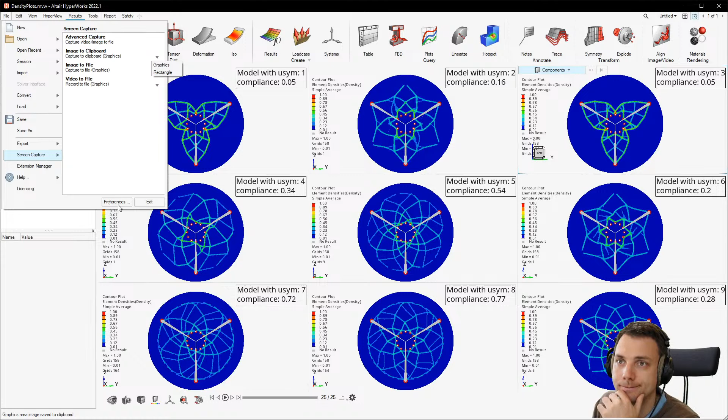Shortcut. No. No screenshot. Or I don't know. Maybe there is, and I have not met it. I'm sure you can customize it so that it has a capture shortcut, but until now I don't see any. Maybe there's also an icon I missed. That could also be for report, maybe capture.

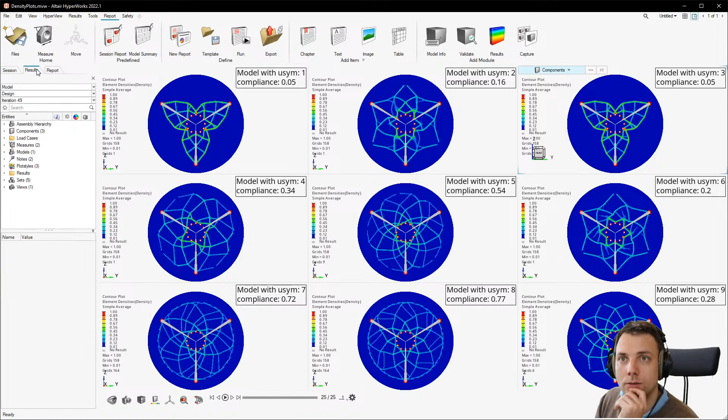Oh, I'm not sure what this does now. Ah, report. Okay, I like that. But I don't want to have a report here right now. No, cannot delete it. Doesn't matter. Yeah, you have a session file here. That's also cool. Results file. Result model browse, you would say. Okay, I did a screen capture.

Now let's go to PowerPoint and just paste it in here. Just compare the two to each other. So it's a little bit dark here, but in terms of visibility and usability, it's quite good, I would say. Yeah, you can use this. All right, and I think I will use this more or less for the video I'm doing about cyclic symmetry. So this will definitely be on there.

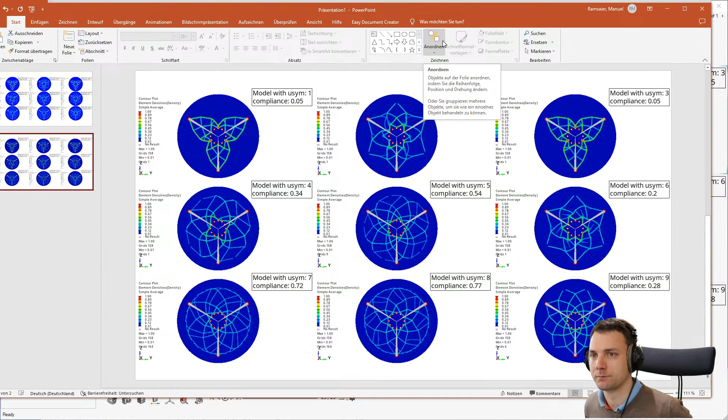Yeah, and I think that's about it for today. So I was just doing a little bit of the work for advancing the topic, and just making a little bit of progress, I guess. And the next steps would be to also post-process the other values and see how the thing changes. Then again, if I overdo the design constraint loosening, that means that the structures will get big. And that means that we could play around with min member. And that means a whole other topic of symmetry, results comparison, and stuff like that.

So you see how this tool of getting the compliance values will definitely help me achieve that much faster than if I had not done that tool. I mean, for sure, that tool cost me around 2 to 3 hours to program. But on the other hand, I did that to do it properly, because I want to better learn to do a CLI properly. And so I just made this foundation for future work to put in much more than just these post commands, but maybe also pre-commands and stuff like that. So stay tuned. I think this will be a pretty interesting topic, and also pretty useful.